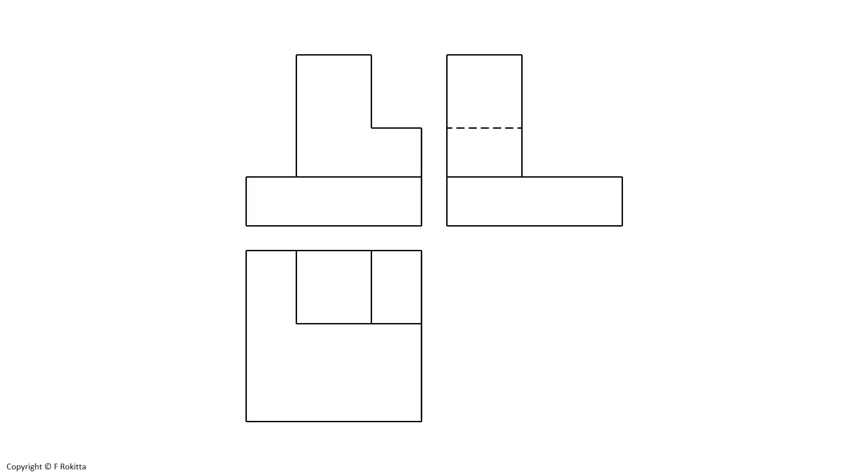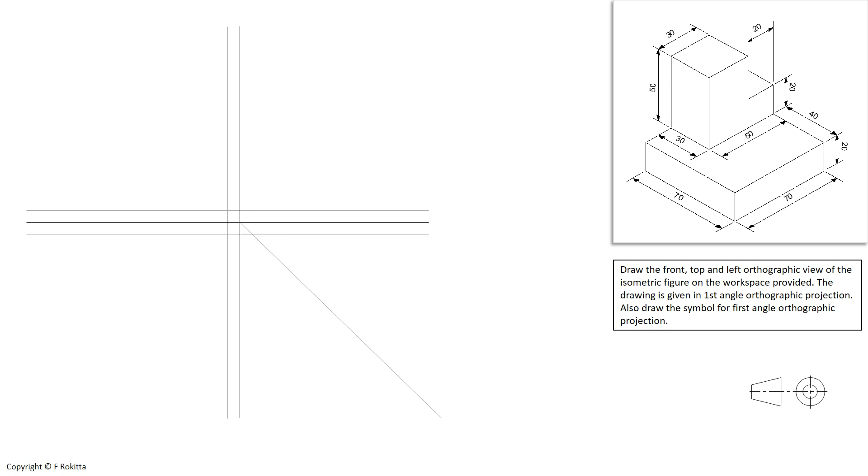I have already provided the symbol for first angle on the paper. Now we see the margin lines and the X and Y axis on our answer sheet. If this was not provided to you, you would have to draw in these details for the diagram first.

Based on the knowledge acquired from previous tutorials, you would know how to take the measurements from the 3D model on the question and carry that over onto your orthographic drawing. Remember to start at the anchor point of the front view. We will now carry over all of the heights onto the left view of our orthographic diagram. We will also take the lengths of our front view down to the top view.

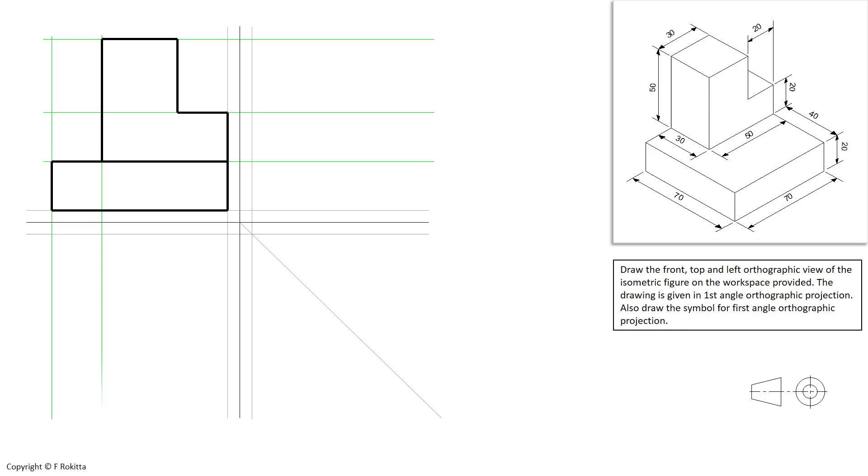Once you have finished all the projections from the front view onto the left and top view, you will continue to draw the answer for your top view on the orthographic drawing. Make sure that you carry over the correct measurements from your 3D model onto your top view, and that you start your measurements from the anchor point. The top view's layout will look as you see here on the screen when you have finished carrying over all the distances.

Once you finish the top view, project the projections from the top view onto the 45-degree mirror line and project them 90 degrees up to the left view. This will give us the base layout for our left view.

When you start drawing the answer for your left view, make sure that you have carried over the correct distances from your 3D model onto your left view. Start measuring from the anchor point and make sure that your heights and depths are consistent with the projection lines carried over from the top and front view.

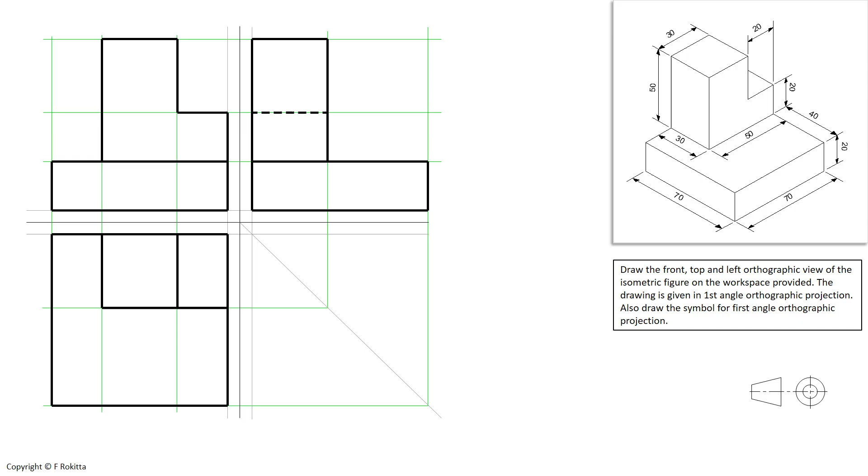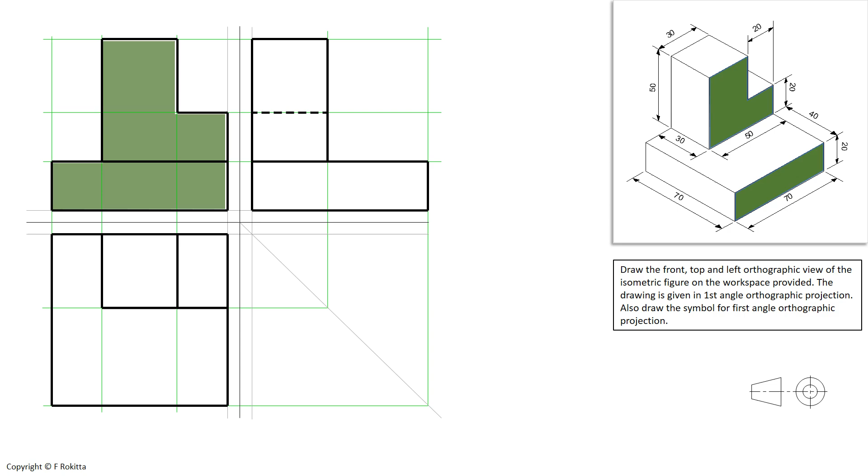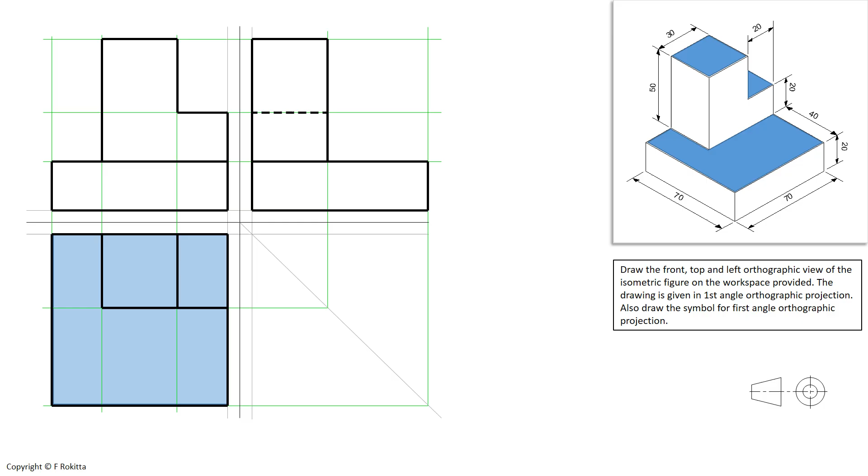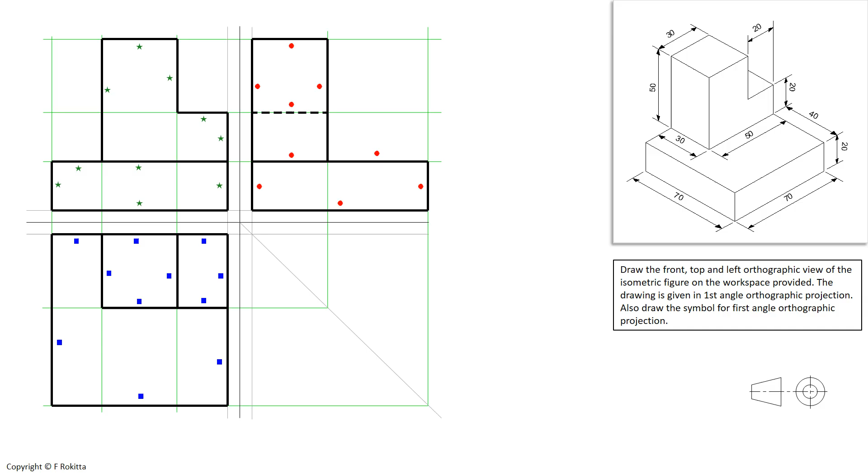On this screen you will see the mark allocation for our drawing when we have completed our 2D orthographic answer. The green stars once again represent the mark allocation for the front view. The blue squares will indicate the mark allocation for the top view, and the red circles will indicate the mark allocation for the left view. It is also possible to add more marks for your constructions and for adding the symbol for first angle orthographic projection.